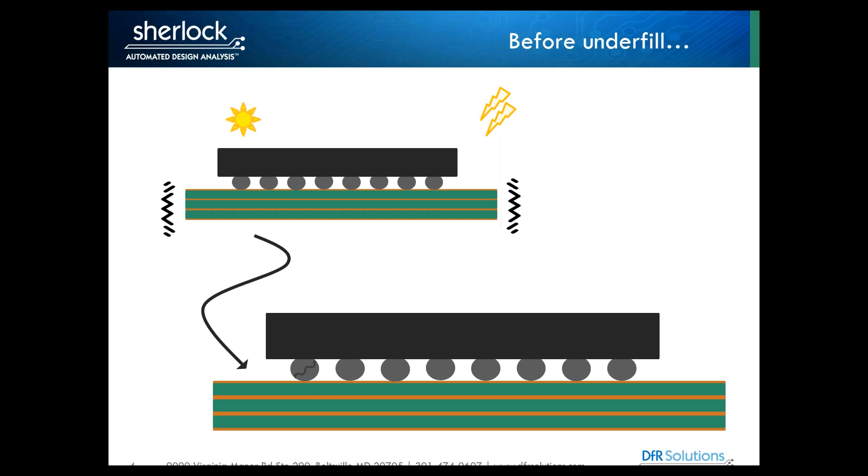So first, we're going to talk a bit about how, in today's electronics industry, underfilling is a bit of old news. Before underfill, which was probably decades ago, whenever you had a component in a product go through your testing, so your drop testing, thermocycling, vibration, as indicated by these icons here, you would get certain failures in your solder joints, specifically when dealing with BGAs, for example. You would see failures earlier than desired.

After the invention of underfills, which happened, I think, quite a few decades ago, this helped to mitigate the problem. So under thermocycling, under vibration, under shock, applying underfill, applying this type of material underneath the components, as the name suggests, helped to prevent these failures. It helped to prevent some of the strain loading that was being applied to solder joints, and therefore they lasted much longer. So that's a high-level overview of underfill, a bit of motivation for why we've been doing it for so long.

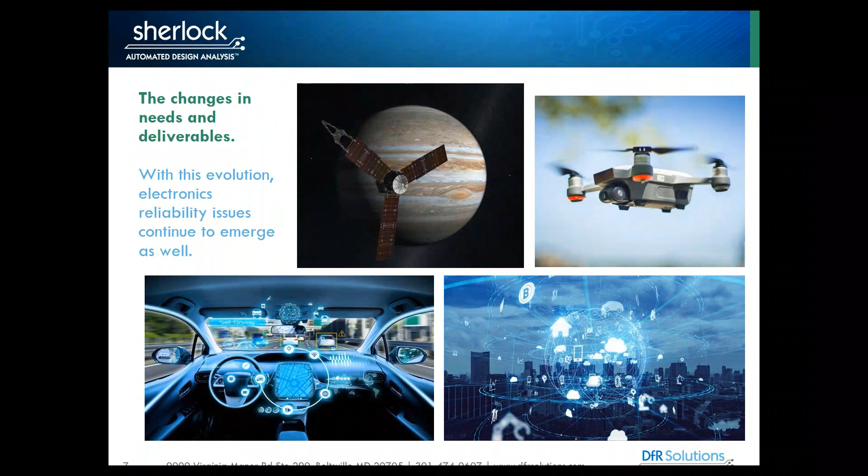Now the idea is that in today's industry, the needs for our products and the deliverables are evolving. It's coming along very quickly, and we always have to continue to approach these problems and increase the reliability of our electronics. So for example, right now we have drones, we have electric cars, we have our computers, we have our wearables, we're sending satellites to Jupiter, we're sending robots to Mars, we're sending everything out there. So the changes in the environments that these products are going to experience are very extreme, very dynamic.

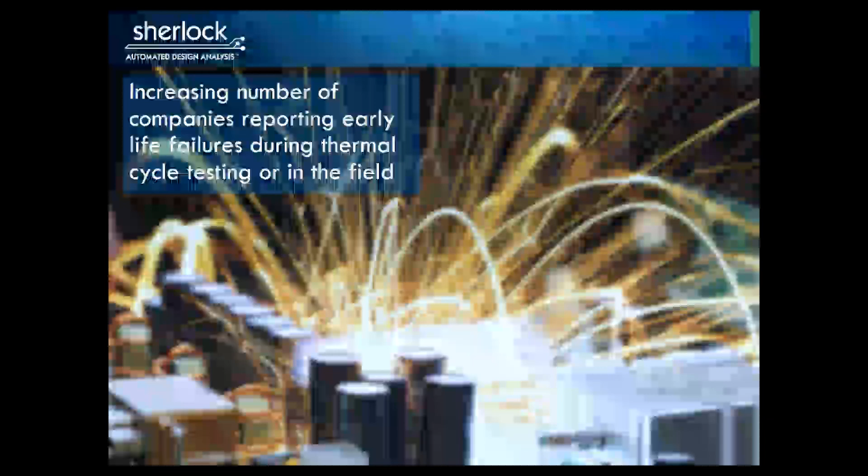Because of these different environments and different stimuli, there's always that increase in reported failures due to things like thermocycling in testing or even in the field, and not just thermocycling, but vibration and shock as well. So where does underfill become a little bit of a problem? Well, the use of underfill greatly influences the failure behavior under shock and vibration. As I've said before, it was intended to help mitigate these sorts of stresses. But underfill materials can cause warpage and tensile stresses that can greatly reduce the time to failure.

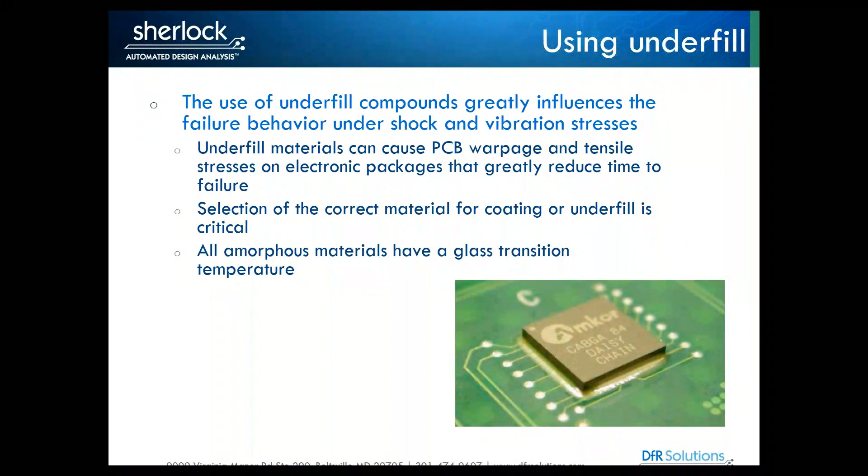The selection of the correct material is critical. So this becomes very important. You can't just underfill with any random material and expect it to do what you hope it would do, and we'll see that in examples that I present today. One of the material characteristics that becomes very important is the glass transition temperature. All amorphous materials, underfill materials, have a glass transition temperature. What this means is that the mechanical properties of the materials change as a function of temperature.

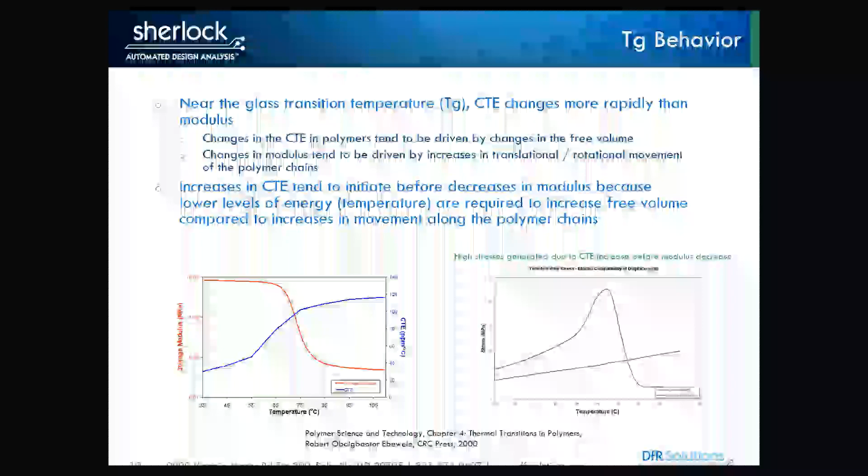Also of note is that the increases in CTE tend to initiate before the decrease in modulus, and this is simply because lower levels of energy or temperature are required to increase free volume compared to the increases in movement along the polymer chains. So all of this Tg behavior influences the stresses that are going to be applied on the board, on your solder joints. It's a very complicated problem to have to address.

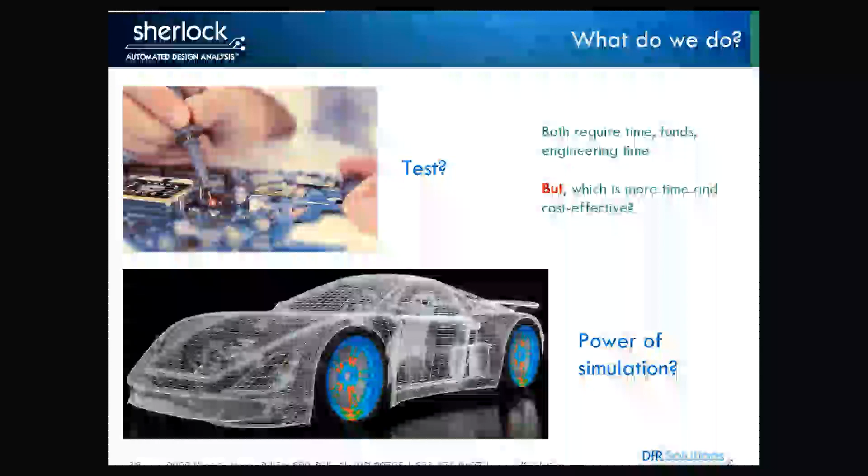So how do we effectively keep up with these changing underfill materials? And then on top of it, our changing needs, our needs to put different types of devices and products in different environments. Should we do testing? Should we take advantage of the power of simulation? So just to give kind of a high-level view, both of these require time, funds, engineering time, but which of those is more time and cost effective? We need testing. There's absolutely no way to get rid of it, but perhaps there's a way to use the power of simulation to complement testing and hopefully derive a more effective approach.

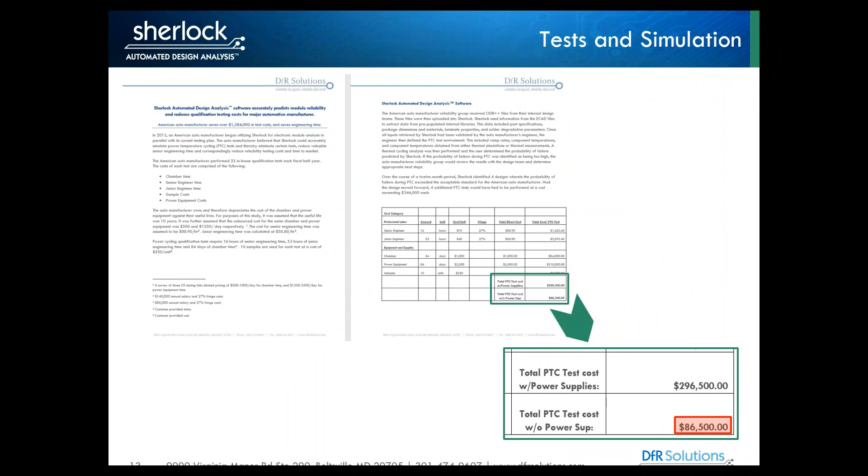So here I have a very brief case study that DfR did where we were able to collaborate with an American auto manufacturer, and we were able to do a study on where savings would occur if you use the power of simulation. And just to highlight the high level here, what was really important is that through simulation, we were able to see where testing could be even more effective and where savings could occur, which becomes very important when you have things like KPIs, when you have things like time to market. It becomes very critical for you to have effective testing and also be able to save money as well.

So with that motivation in mind, that simulation can really help to complement testing, can help to have a more strategic approach moving forward, how do we simulate the influence of underfill in Sherlock? Well, to give you that bigger picture view of how things work in Sherlock, if you're not familiar with it, these are the steps that you would typically take. If you're one of our users listening on this webinar, then this may look familiar to you. So I've broken things down to 4 basic steps.

So the 4 steps are, step 1, you start with your life cycle conditions. So what are your environmental conditions? What is your thermal cycling? Do you have a vibration profile? Do you have any other stimulus that's going to become very important here? Next, once you understand your life cycle conditions, once you understand your reliability goals, so to speak, that being, I want my product to last for 5 years under these environmental conditions. That's what my goal is going to be. Once you have that in mind,

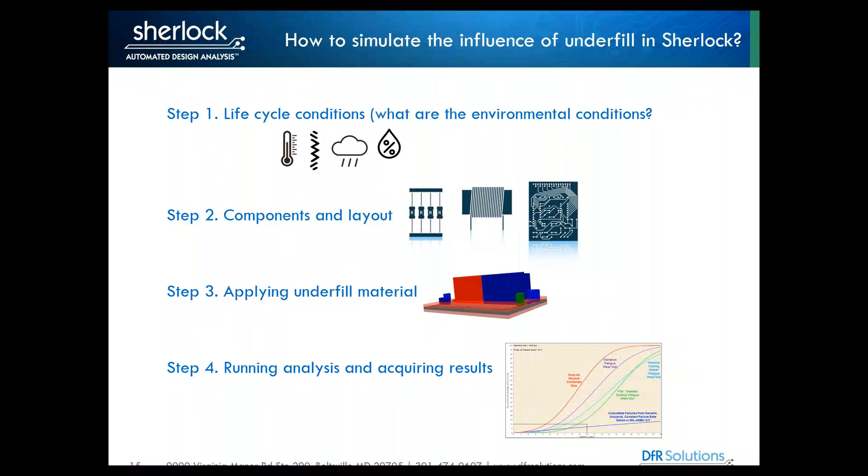When you have your component layout perfected, which again is just a couple clicks of work, you apply your underfill material as necessary. Next, it's a couple clicks to run the analysis and acquire really good results. And you can see how your BGA, for example, is going to survive with or without underfill materials under specific conditions. So that's the example that I'm going to present today.

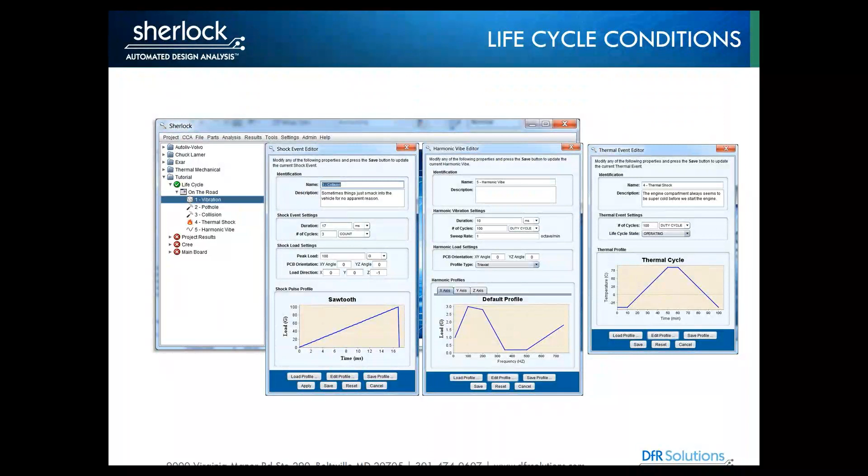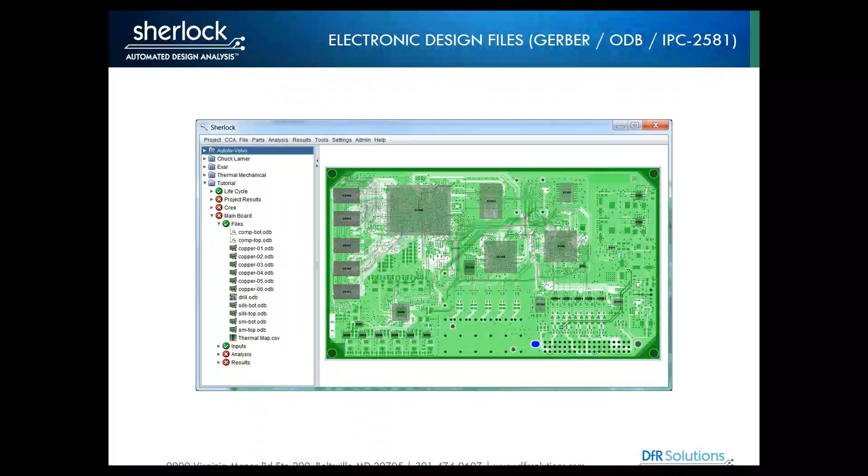So step 1, anyone that's familiar with Sherlock would know that it's very simple, kind of like filling out a form to input your shock events, your harmonic vibe events, your thermal events. Very easy to get this information that's used in tests into the simulation environment within Sherlock. Step 2 is using the electronic design files, so your Gerbers, your ODBs, your IPC 2581, all information from your copper layers to your component layout, to your silkscreen, and so forth, are populated within Sherlock, and then a beautiful picture of a PCBA is shown in 2D.

One of the other steps, or minor steps, which can be pretty powerful, especially in the automotive sector, is to define your laminate glass constructions. So usually you would, for example, use generic FR4 or an Isola or any of the hundreds of laminates that we have within the tool.

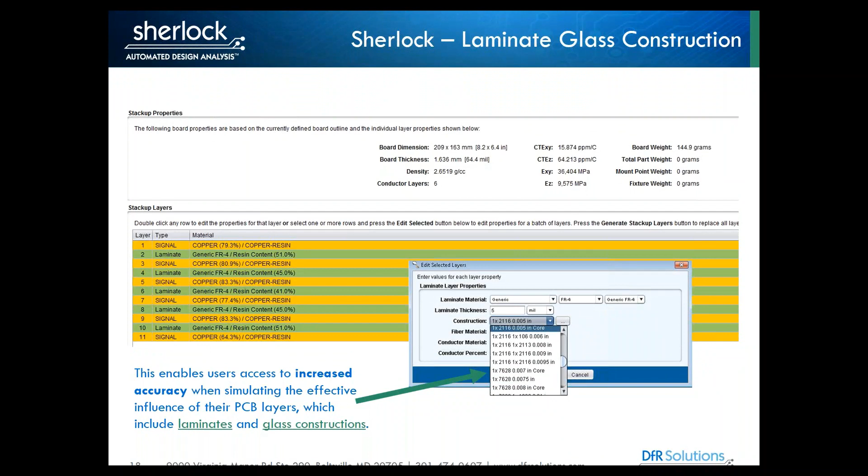One of the other things you can do is specify your laminate constructions. So for example, if we're using 2116 or 7628, this will affect the effective overall CTE and modulus that you experience on your board. So being able to appreciate these minor details, which can be significant details, will increase the accuracy when simulating the effective influence of your PCB on your components.

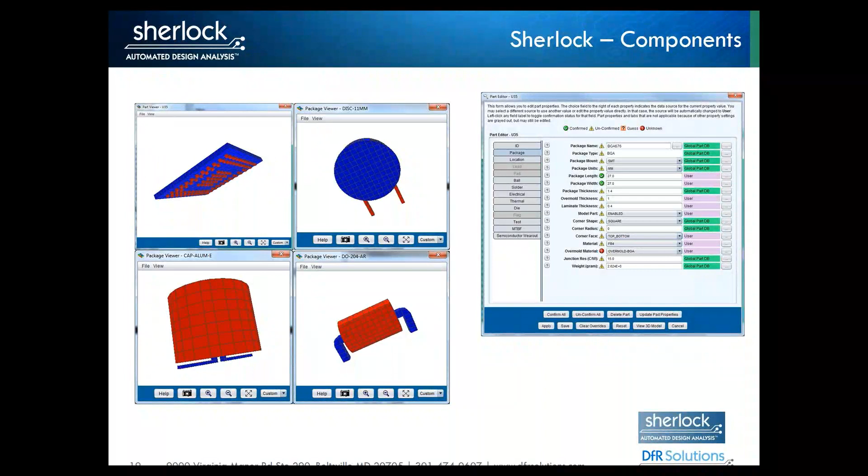Within the component layout step of developing a Sherlock project, there's always the ability to model components in very great detail. So for example, in today's example, I'll be doing a BGA that's underfilled, and we'll see a bit about that later. There are also a significant range of packages that are built into the tool, and you can take advantage of that depending on what you need.

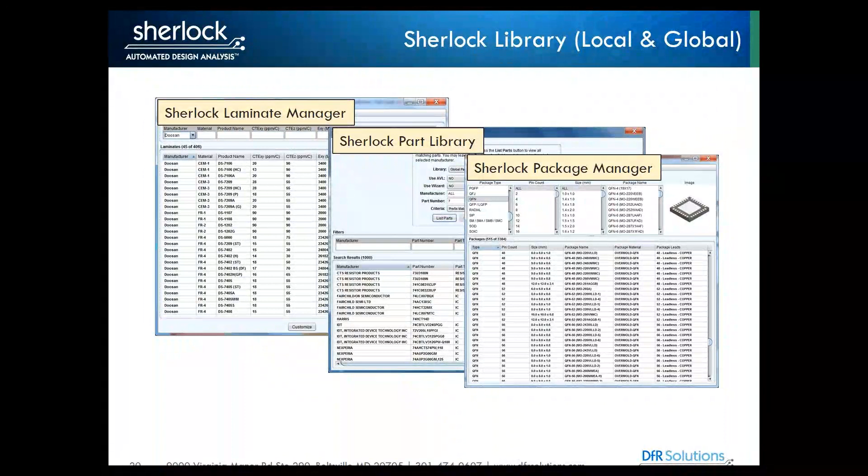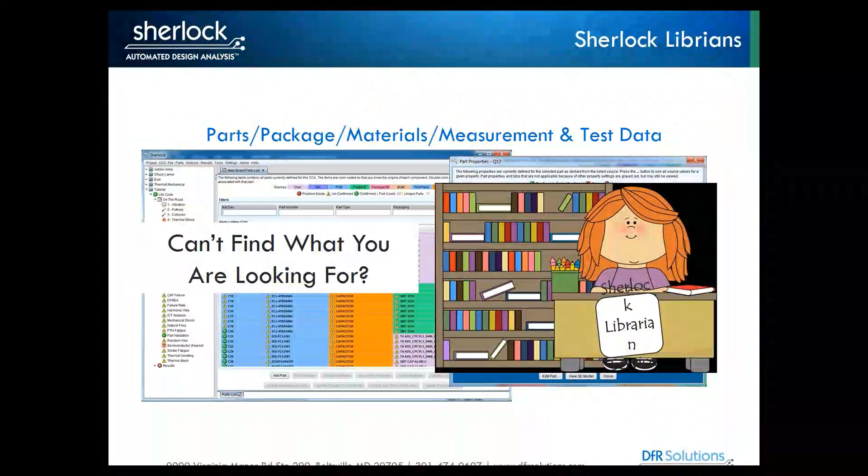Within the tool, just an FYI, this is more for the audience that is not as aware of Sherlock. There are several libraries within the tool that allow you to take advantage of different laminate materials, different part libraries, package manager, and if you're not able to find what you're looking for, we have a librarian team. And our librarian team is able to produce these Sherlock definitions that you need to complete a successful project.

So, applying underfill. Answering the topic of this webinar, which is how to handle underfill in Sherlock. Well, here it is. It's a very simple, at least a 3-click process. You go into our potting functionality within the tool. You select edit potting regions, you add a potting region, and from there you can select various shape types.

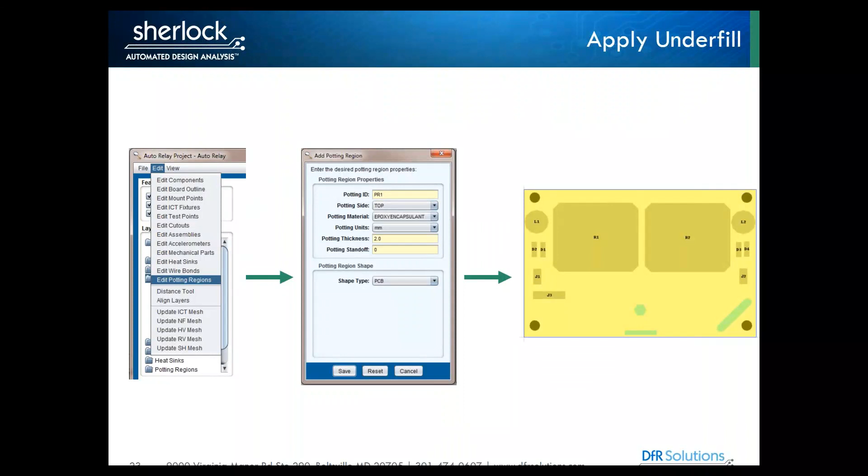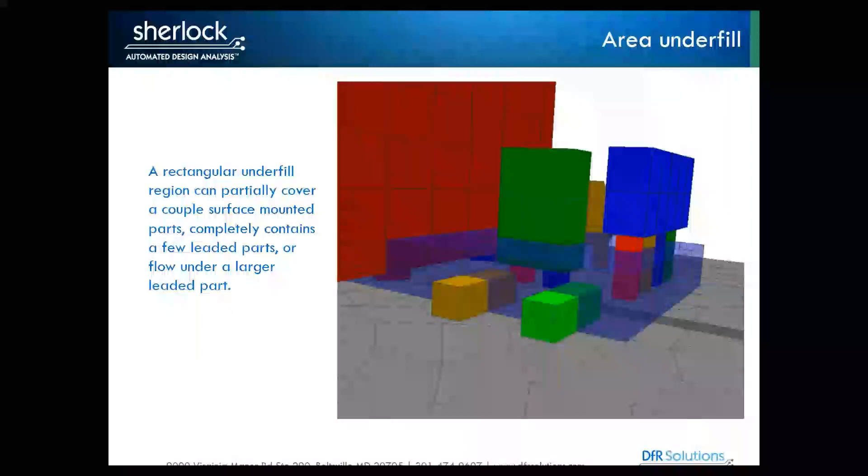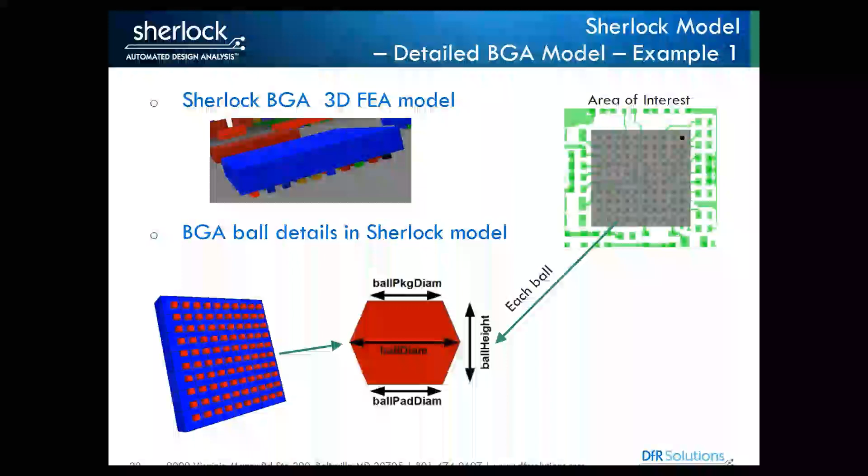So just to reiterate, it's a very simple process, a couple clicks, and by taking advantage of that and the materials library within Sherlock, you're able to very quickly underfill your BGA and run an analysis. For today's example, I will be running a thermomechanical analysis. I have cycled my BGA from -40 to 85 degrees, and seen at both the high and low temperatures what the strains are going to look like, and whether there will be any issues with the underfill that I have selected.

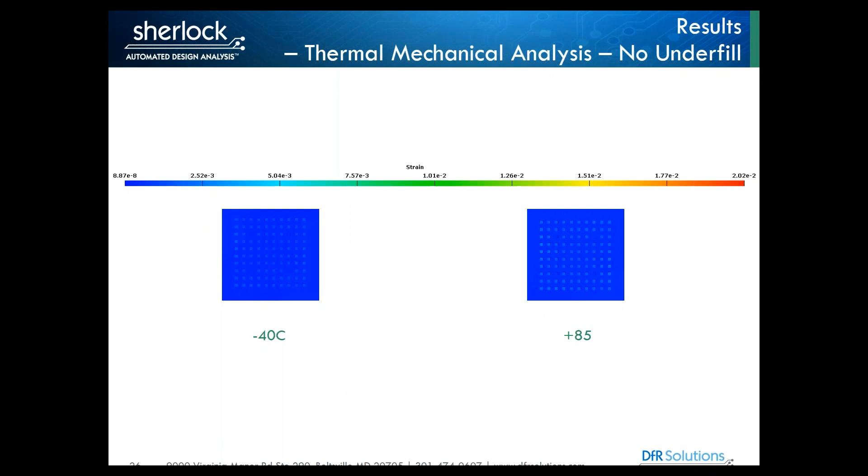So moving forward, let's take a look at those results. First, in this thermomechanical analysis running from -40 to 85 degrees, we see without underfill in this particular example, nothing eventful is happening. There isn't much strain. The strains are pretty low. I'd say things are looking pretty good. We're satisfying our reliability requirements.

With the underfill now, let's put this into context. There's a lot of information on this page. When we started the presentation, I mentioned that underfill has been used for quite some time. The motivation was to alleviate the stresses that were being applied on the solder joints during thermal cycling.

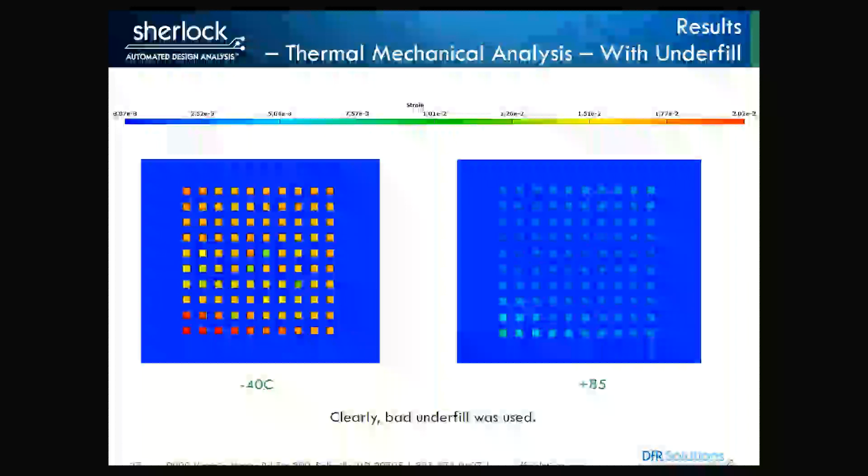Here, we're seeing that with the application of underfill, we have significant strains that are happening at the colder end, and then not so much at the higher end, but what I want to highlight is the strains that are happening at the lower end, because these are going to be a source of stresses and strains that are going to cause failure. So in this particular situation, where clearly a bad underfill was used, we're seeing that maybe choosing underfill with the motivation that it will help to alleviate failures is a great motivation, but you really need to understand your mechanical properties of the underfill material of choice.

So for example, within this underfill that I've chosen, there is a specific glass transition temperature that wasn't paid attention to. So when you're cycling through this glass transition temperature, this is causing the issues that we're seeing here. Another note is that if you were interested in, for example, using an underfill or using a couple of underfills and testing those within a simulation environment, you would not per se produce this product and then figure out at the very end that this would be a problem.

Typically, if you use a lot of testing, then you would see that this underfill might have been a problem, but this specific situation highlighted that this underfill might not be the best for the application. So then moving forward, you would use this information to better choose the next underfill for the specific application. So that's what I wanted to highlight in this example: using underfill is a complicated process, in that choosing underfill is not going to be exactly what you intended, and using simulation can help you to figure out which one might be the best choice.

But also using that within Sherlock means it's a very easy process. So instead of, say, going into your other FEA tools, I know by experience that it takes quite some time to fully develop a model and then apply underfill. But with Sherlock, you can do these really quick what-if scenarios, and that helps you to have some really good results.

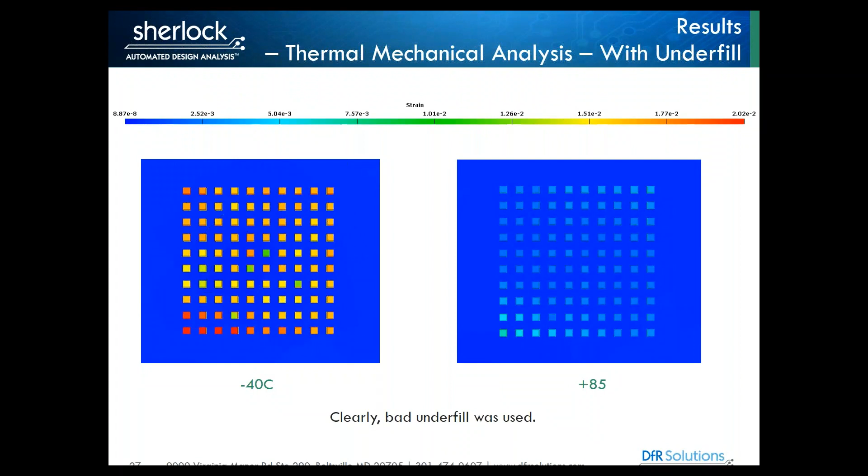So now that we have these strain values, there is a bit that I'd like to announce to our audience today. Sherlock 6.1 is actually releasing very soon, and thermomechanical predictions for BGAs will be available. So while your other FEA tools are going to be able to give you your strain results and your strain map under thermomechanical analysis, none of them is able to actually give you a life curve. And that's been the core of Sherlock up until this point, being able to produce predictions for your products under these different environmental conditions.

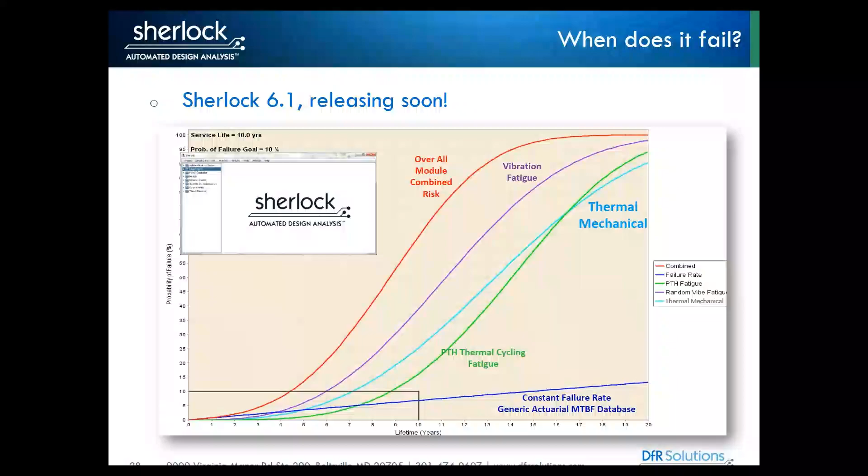So up until this point, Sherlock has been in league with the other FEA tools to give you strain results for your different solder joints. In the next release, you will be able to have the power of prediction as well. You'll be able to run a thermomechanical analysis, and it will answer your questions of when will a BGA fail, for example, or when will a BGA that's underfilled fail. So you'll have access to this very powerful and quantitative information.

So just to summarize this very quick topic that I mentioned earlier on in the presentation, it's easy to use underfill within Sherlock. That's what we all should take away from this about how to handle underfill in Sherlock: it's a very easy workflow that gives you a lot of really powerful results. And within this presentation as well, we're seeing that system level effects are becoming more apparent with the move to higher density, higher power dissipation electronics, but also because of the different needs that we have and the continuously evolving materials that we need to consider.

Also, using a combination of reliability physics and FEA becomes important. Reliability physics is able to use, for example, the strains from my thermomechanical results and give me really good predictions for the life curve of my product. And it just so happens that Sherlock is the only software tool that really is able to give you this complete picture of your product.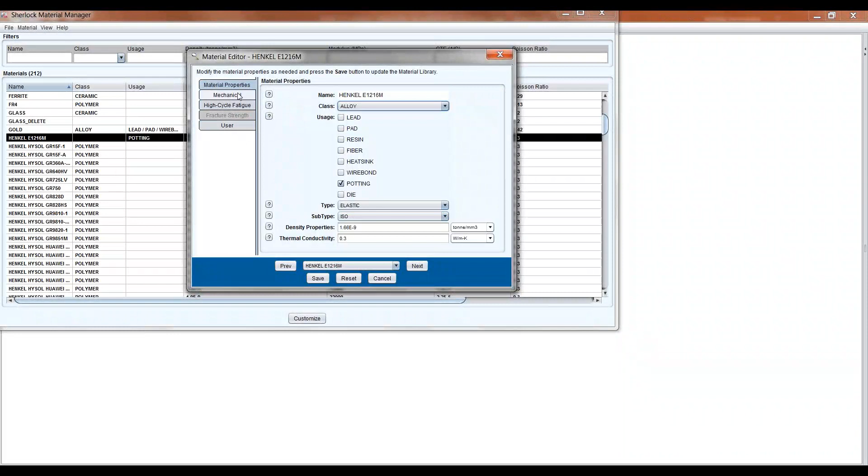We also have our high cycle fatigue. This is very important for things like vibration analysis. Fracture strength is, of course, not important for a polymer. And then user data, of course. So, for example, if you're within one of our enterprise accounts, it becomes very important to be able to trace who takes care of materials. So this is what that looks like. These are all the properties that you need to be able to do a very thorough comprehensive analysis in Sherlock. And just as an FYI, if you're not able to populate all of these fields, we're more than happy to help you with that.

Thank you, Natalie. Next question. What is more important to match the CTE of the underfill material with? Board, BGA material, or solder ball CTE? Oh, that's a good one. I'm going to need my research engineers for this one. What is more important? I'm going to follow up with you on that one, just because I don't want to say something that's incredibly wrong.

Yeah, absolutely. So we can follow up later on. Sorry? We can probably follow up later on. Yes. I have an inclination of what the answer might be, but I prefer not to embarrass myself.

Understood. Next question. You show an example of degradation in solder strain with this quote-unquote wrong underfill. Do you have an example that Sherlock predicts an improvement in solder strain with underfill? Oh, yes, I do have it. So for this specific example, I wanted to just throw a bad underfill under there just to demonstrate that the motivation for underfill was to alleviate the stresses that are on these solder joints.

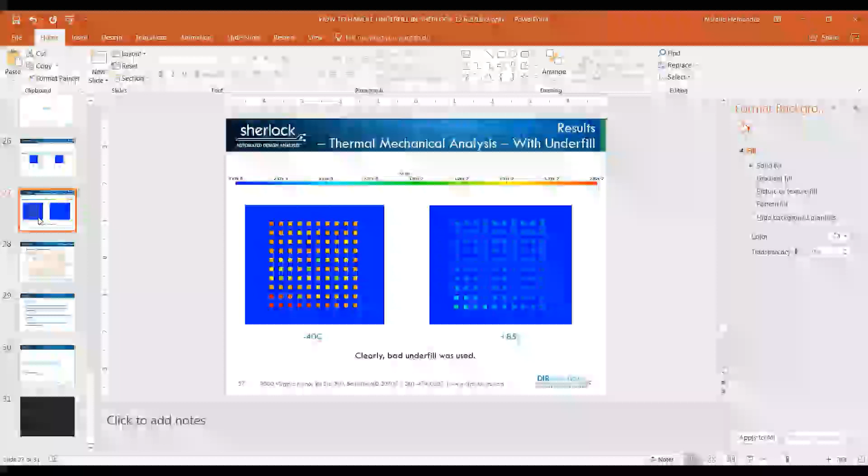Great. Next question. Does Sherlock take into account the effects of underfill expansion in the z-axis that may lift the component off of the board during thermal cycling? Absolutely. So actually, in this specific example, what you'll see happen, because there was a bad underfill that was applied, is that at the very low ends, there's very high strains happening. It's going to cause a bit of a compression of the solder joints.

And then at the higher temperature, you'll have a bit of, how do I say this, bouncing back, so to speak. So it'll compress the solder joints at -40°C, and then at 85°C, you'll see it pry the solder joint off the board. There's a really good paper that shows this by Maxim Serebreni, our research engineer, that shows exactly what I'm talking about.

You'll see this sort of compressive behavior at the lower end, and then at the higher temperatures, when things sort of bounce back, the solder joints actually pried off or were completely destroyed at the higher end. So I'd reference that paper as a recommendation to answer the question.

Great. A couple more questions and we're almost done. What is the definition of good underfill? Oh, that relates to the question that was asked earlier, right? So the CTE of the underfill, should it match the board, the component, the solder joint?

The definition of good underfill: the first thing is that if you are thermal cycling over a certain temperature range, you probably don't want to cycle over the material's Tg. For example, if the underfill glass transition temperature is at 20°C and you are -40 to 85 for your thermal profile, that may cause problems. And again, it's kind of hard to get good underfill to have a glass transition temperature that is

much higher. The second thing would be to have a CTE match between the board and the component itself. So to answer the question I was asked earlier, what do you match to? I would think you match to the board. I think that's going to be my answer for both those questions.

If you have underfill material that has a CTE that matches the board, board warpage is going to be decreased as you thermal cycle through whichever profile you have. And then that would alleviate or prevent any sort of stresses on the solder joints themselves.

So, this is going to be a long-winded answer, what's going to drive the failures of the solder joints is the shear stresses or tensile stresses that you have applied on the joints themselves. And this is going to be because of the interactions between the underfill material and the board, and the underfill material and the component. And a lot of that driving stress is going to be from the board itself. It's much bigger.

So long-winded answer, short answer is to have a good underfill. Look at your glass transition temperature, look at your board properties, but really and truly run simulations and figure out what's going to work best for you before you even go into testing. Use the power of simulation to really complement your testing and to help you do more strategic testing, I think is my answer.

Got it. Okay, next question. Can orthotropic material properties be input into Sherlock for components and potting? Orthotropic. Yes, orthotropic properties. So again, it is in development right now. Orthotropic properties can be used within the underfill materials right now, I believe. For components themselves, if I understand the question correctly, that's something that's in development at the moment.